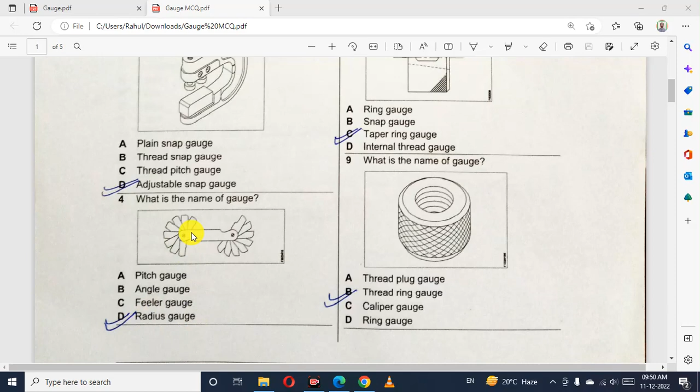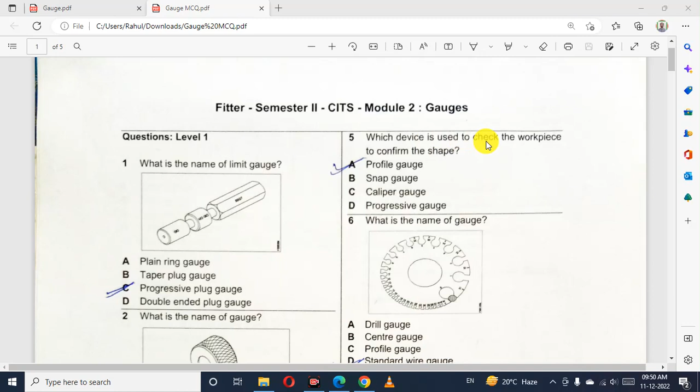Which device is used to check the workpiece to confirm the shape? Profile gauge. Which device is used to check the workpiece to confirm the shape? Profile gauge.

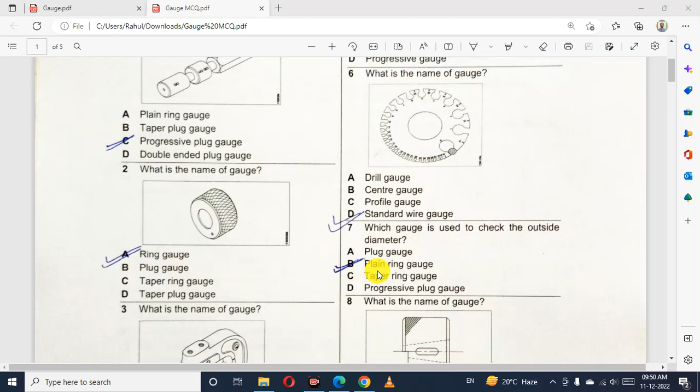What is the name of gauge? Standard wire gauge. Which gauge is used to check the outside diameter? Plain ring gauge. What is the name of gauge? Tapered ring gauge. What is the name of gauge? Threaded ring gauge.

What is the name of gauge? Snap gauge.

Which material is used to clean the slip gauge? Carbon tetrachloride. What is the name of instrument used for measuring the external diameter?

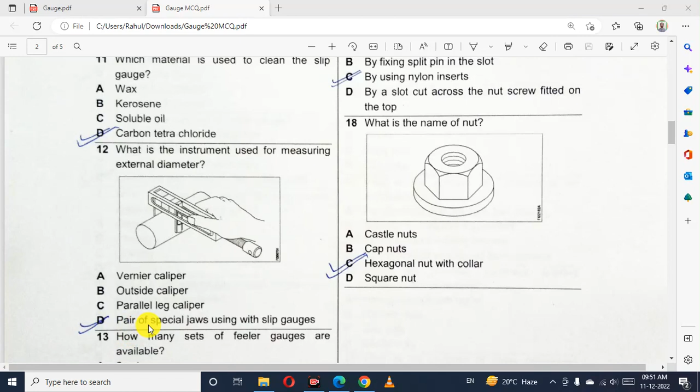Pair of special jaws used with the slip gauge.

How many sets of feeler gauge are available? 4 sets.

Which protective coat is applied on the surface of the slip gauge against rust? Petroleum jelly. Which protective coat is applied on the surface of a slip gauge against rust? Petroleum jelly.

Which material is used to make slip gauge blocks? High grade steel.

Which is the method of locking the number of bolts with the help of soft steel wire? Insert and twist wire locking.

How is self-locking achieved in a simmonds nut? By using nylon insert.

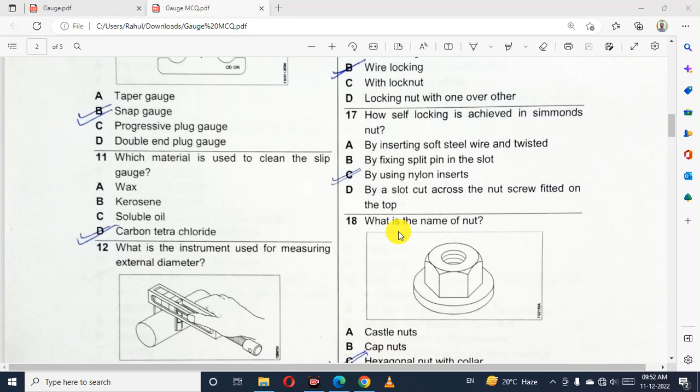What is the name of nut? Hexagonal nut with collar.

Which gauge is used to check the gap between the mating parts? Feeler gauge. Which gauge is used to check the accuracy of an external thread? Threaded ring gauge. Which gauge is used to check the accuracy of external threads? Thread ring gauge.

What is the purpose of feeler gauge? Check the gap between the mating parts.

What is the act of joining slip gauges together by building up size? Ringing. Which gauge is used? Which grade slip gauge is used for precision tool room applications? Grade 1. What is the purpose of taper plug gauge?

Check tapered hole and whether it has a perfect fit.

What is the thickness range of BIS set of feeler gauge? 0.02 to 1 mm. What is the thickness range of BIS set of feeler gauge? 0.02 mm to 1 mm.

What is the calibration grade of slip gauge? Grade 0. Grade 0 is calibration grade, grade 00 is reference gauge, grade 1 is inspection gauge, grade 2 is workshop gauge.

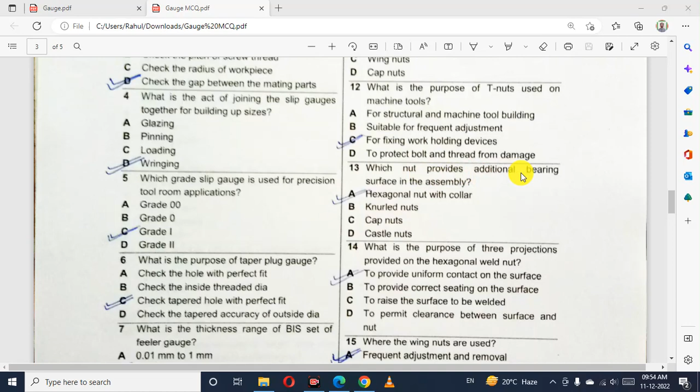Which nut provides additional bearing surface in the assembly? Hexagonal nut with collar.

What is the purpose of the three projections provided on the hexagonal weld nut? To provide uniform contact on the surface.

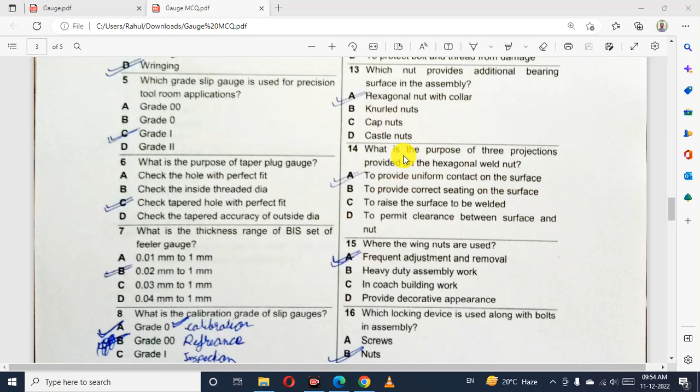Where are wing nuts used? Where frequent adjustment and removal is required.

Which locking device is used along with the bolt in assembly? Nuts.

Which nut, both faces machined, is placed below the nut of the assembly? Lock nut.

Which nut provides positive locking while tightening? Sawn nut. Which locking nut has nylon and fiber ring inserted, placed in the upper part of the nut? Self-locking nut.

Which locking device is used to prevent the hexagonal nut from loosening? Locking plate.

Which locking device is used to prevent the hexagonal nut from loosening? Locking plate. Which washer is used for locking the nuts that are located near an angle, edge and corner? Tab washer.

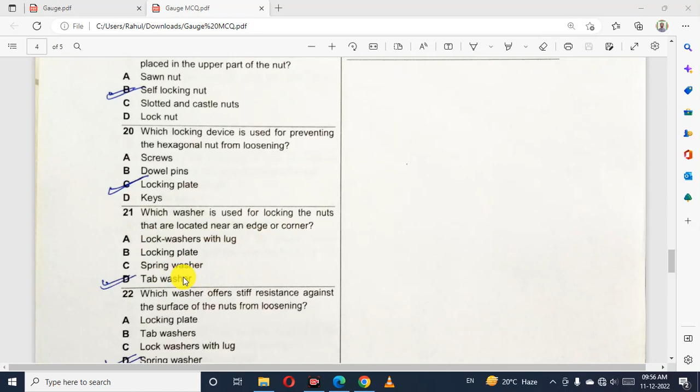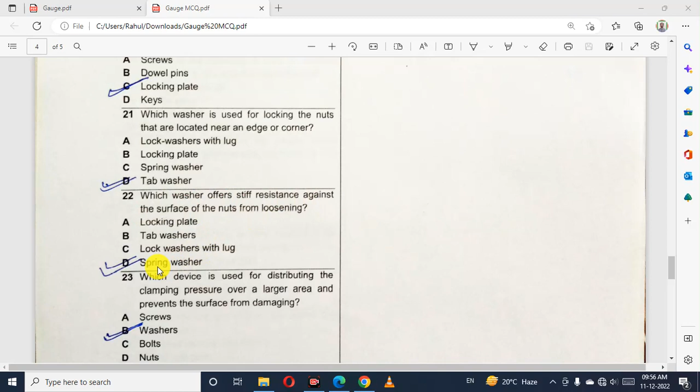Which washer offers stiff resistance against the surface of the nut and prevents loosening? Spring washer. Which device is used for distributing the clamping pressure over a large area and preventing the surface from damaging? Washer.

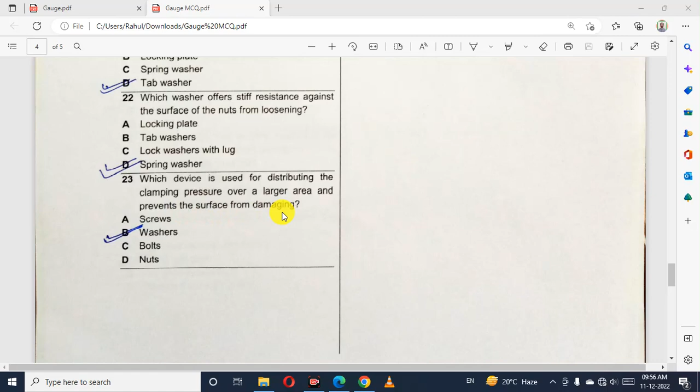Which device is used for providing an increased bearing surface for bolt head and nut? Washer. Which washer is used with a flat and oval type head screw? Countersunk type.

Find out the height of a slip gauge where sin 25 equals 0.4226. So sin 25 equals BC upon AB. So the answer will be 84.52 mm.

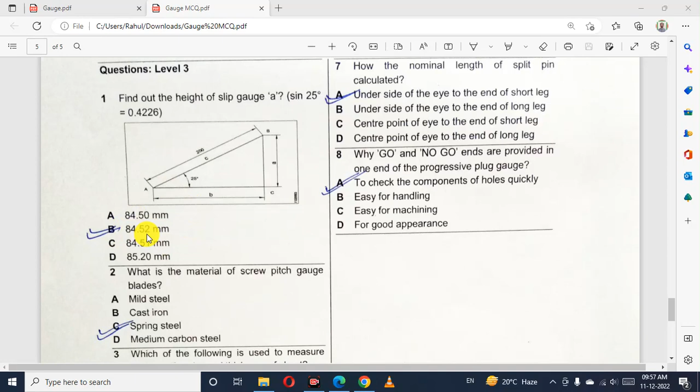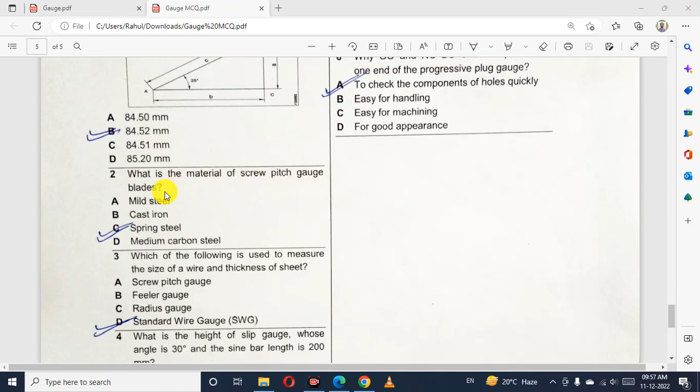What is the material of screw pitch gauge blades? Spring steel. What is the material of screw pitch gauge blades? Spring steel. Which of the following is used to measure the size of a wire and its thickness?

Standard wire gauge.

What is the height of the slip gauge, given the angle of 30 degrees? The sine bar length is 200 mm. Same as above, it needs to be done at 100 mm.

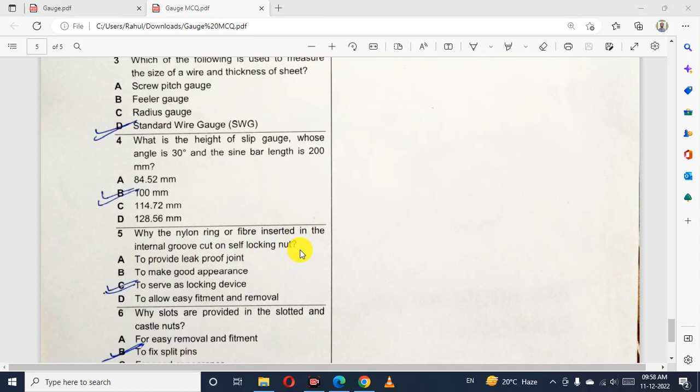Why is the nylon ring or fiber inserted in the internal grooves cut on the self-locking nut? To serve as the locking device.

Why are slots provided in the slotted and castle nut? To fix the split pin.

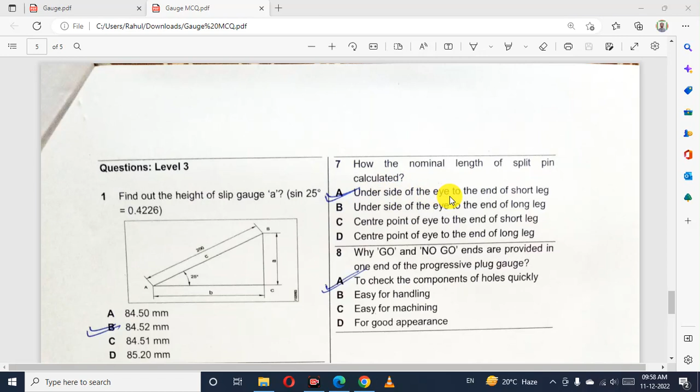How is the nominal length of a split pin calculated? From the underside of the eye to the end of the short leg. How is the nominal length of the split pin calculated? Underside of the eye to the end of the short leg.

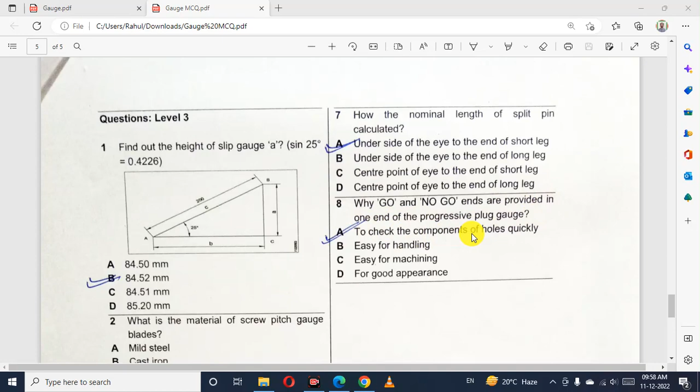Why are 'no go' and 'go' ends provided at one end of the progressive plug gauge? To check the component of the hole quickly.